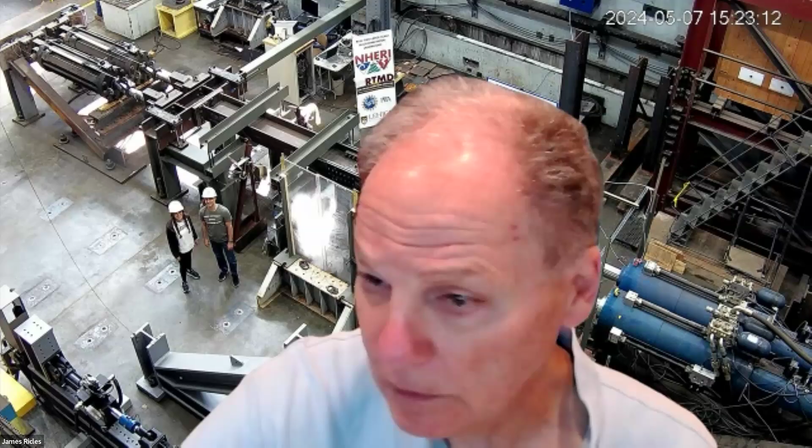Thanks, Jim. Let me just get these up here and I'll share my screen. Please hold. Can you see those slides, Jim? Yes. Okay, perfect. All right, great.

So as Dr. Ricles had mentioned, my name is Dr. Joseph Saunders. I am the NHERI Lehigh Experimental Facility Operations Manager. I'm going to just briefly introduce you to the team here at NHERI Lehigh, go over the agenda, what we plan to present here, and then follow up on what Dr. Ricles had mentioned already on what are our objectives.

So first, the team here, the team is what makes NHERI Lehigh happen. Everyone you see here, and then we have additional staff to really make this organization great and help provide you capabilities and research opportunities. So to start, Dr. James Ricles and Dr. Richard Sause as PIs and co-PIs. They have been our leaders here at NHERI Lehigh for over 20 years. So a vast amount of experience leading the charge.

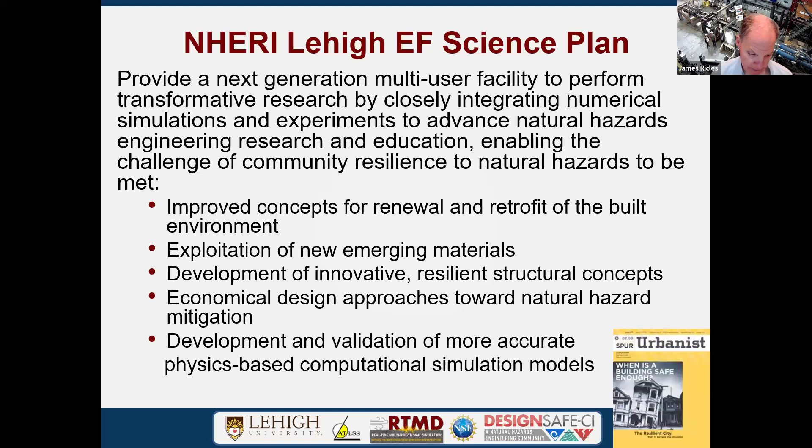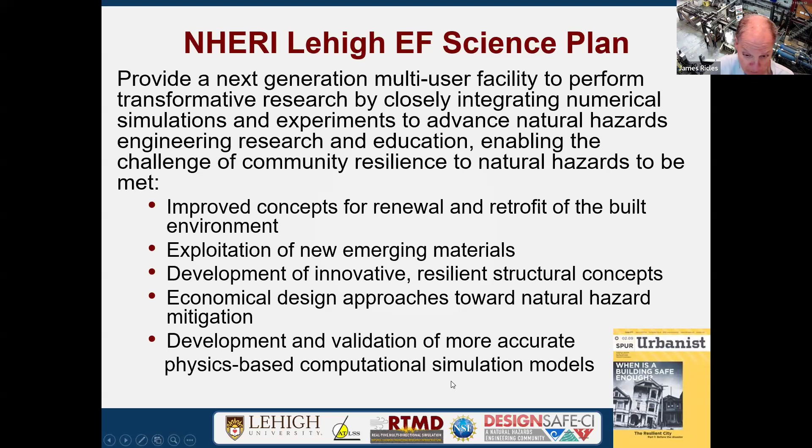This is very important, because what the National Science Foundation likes to see—and you've got to think about this—is that you can't test everything, you can't test everything forever. So our goal here is to do high quality experiments where you can acquire detailed, refined data that you, or someone else, could follow up on to develop accurate physics-based computational models. These are then used for numerical simulations as a follow-up—that would be the next step.

Now, sometimes researchers are a little overwhelmed at first about using our facility, or it's a little daunting to write a proposal. I'd like to comfort you by saying we've been doing this for a while. We try to always adapt toward evolving opportunities and techniques, and in doing so we develop user-friendly tools, so that as a researcher you can readily utilize our facility to do high-end experiments and use the algorithms to perform the research you need.

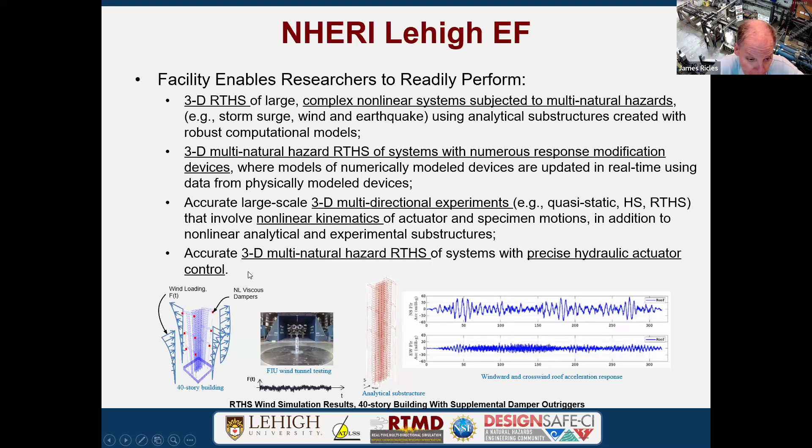So what are some of the impacts here? This is something you want to think about when you write a proposal. You have an idea, but you've got to express to the reviewers and the National Science Foundation or the sponsoring agency what the broader impacts are, because this will separate you from the group of other people submitting proposals.

Here are some impacts about our facility. We can address key questions through research that could lead to various results. One being the development and implementation into practice of new natural hazard mitigation strategies and innovative structural systems. We have a lot of staff, including myself, who are professional registered engineers, so we have a really good sense of what goes on in the real world. Most all the staff has worked in practice, so we brought that to the facility for you.

The other broader impact is enhancing the understanding of the response. This is in the NHERI science plan, one of the things emphasized here. What I add to that is accounting for soil structure interaction as well as fluid structure interaction effects. We've managed to do that.

The other thing is a comprehensive system level effects on the structural and non-structural components through this 3D hybrid simulation. Components don't act individually - they're in the structure, there's a system, and you have to account for those interaction effects. It's very important. I already mentioned the fact of high quality data - this is going to lead again to more improved models for response prediction.

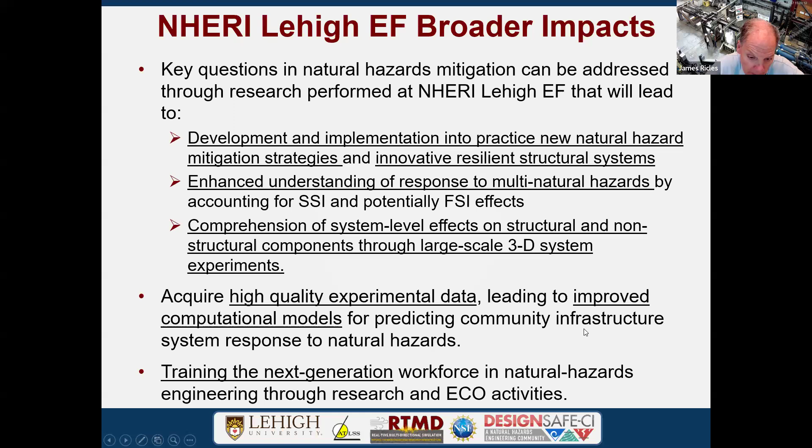Now, here are just some examples. I'm going to be rather brief here, but these are some example projects - some of them are real, others are what I could envision here. We can look at semi-active control devices that are autonomous to enhance the resiliency and performance against multi-hazards. This approach would be real-time hybrid simulation.

We could look at advanced bracing systems and shape memory alloys. We actually have a project already in the lab on that someone followed up on. The approach we would take, and you'll see a discussion later about the technique, is called quasi-static or hybrid simulation.

There's interest in developing complex computational models, and for that you need the data. Here's an example in which the facility could be used to look at advancing multi-directional, through multi-axis loading, of reinforced concrete materials.

There's also non-structural work, like floor isolation systems, since the contents of buildings are sometimes more valuable, both financially and in terms of impact on the building itself. Here's a project ongoing from the University of Oklahoma related to multifunctional floor isolation systems.

We also have additional non-structural components for minimizing hazard losses. This could be cladding or other things that are added that also dissipate energy.

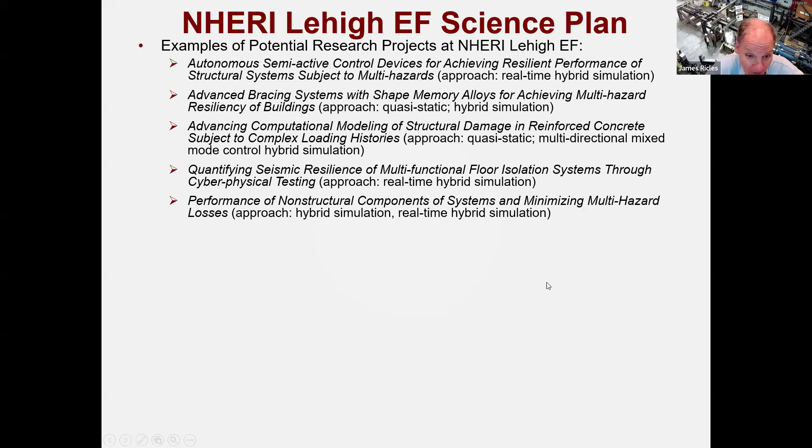Soil structure interaction is becoming very important. It could help you, or it could hurt you. It hurts you if you ignore it, since it adds flexibility, and it helps you if it adds radiation damping. So you need to really account for it, particularly in tall buildings where a soft soil with a heavy load on it could have an effect.

Semi-active controlled cladding, I mentioned cladding. You can have semi-active controlled cladding that we've worked with.

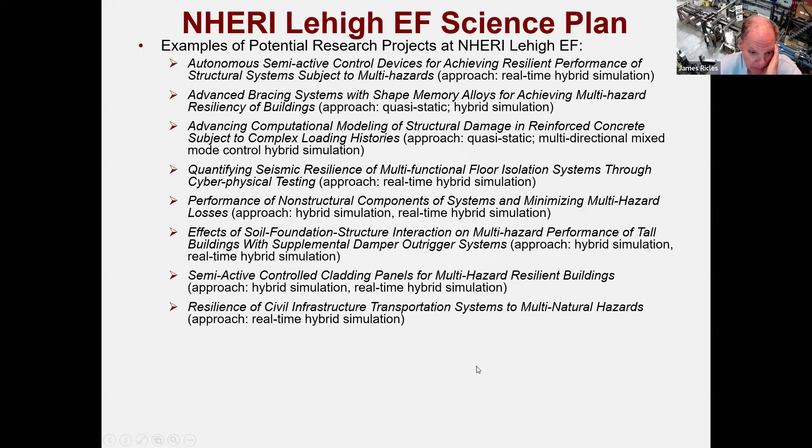Transportation systems - NSF does allow you to now look at transportation systems, and as you know, they're really the arteries of the U.S. economy for transporting things. So this is very important.

Fire hazards are also now fair game with NSF. I'll give you a reference a little later. We do have a furnace that we can use for that purpose.

Coming back again to soil structure interaction, you could have response modification devices, but guess what? Especially with TMDs, it may not be tuned properly because the soil that's actually there in the system - you omit it in the model, and we could account for that in our simulation. So it's very important to consider the system as a whole, including all these other effects.

Very, very important, and people have come to realize this more recently with all the storms and climate change, is the coastal infrastructure and the inundation from storms or tsunamis. We have a new faculty member, Claudia Reich, who's an expert in this area and could lend some guidance on that. She's doing research herself in this topic.

So with that, let me describe the facility. We were originally a NEES facility, Network for Earthquake Engineering Simulation, but we really like to think of ourselves as being a real-time multi-directional facility. You can replace earthquake with multi-hazard if you wish, but earthquake is where we initially were born.

My own background is originally earthquake engineering, but obviously I had to migrate towards other areas in order to adapt to the pressing needs in research. So we're very unique in that we have a portfolio of equipment, instrumentation, and infrastructure itself.

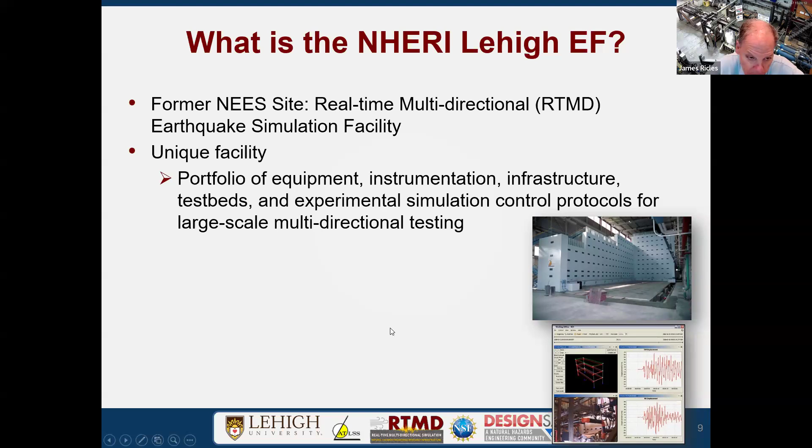Now, on the right, you can see many experiments going on - I think I counted 8 here. We currently have 13 in our lab, but we manage. Joe Saunders has a big stick and makes sure things get pushed in the right direction in the lab, but we're very efficient in that we can conduct concurrent multiple large scale experiments. So the wait time is not like a shake table where you have to wait till someone gets off. We allocate space basically based on the need and the demand.

Very experienced staff - I mean, they could do anything. Some of them have been around for 40 years, longer than I have here at Lehigh.

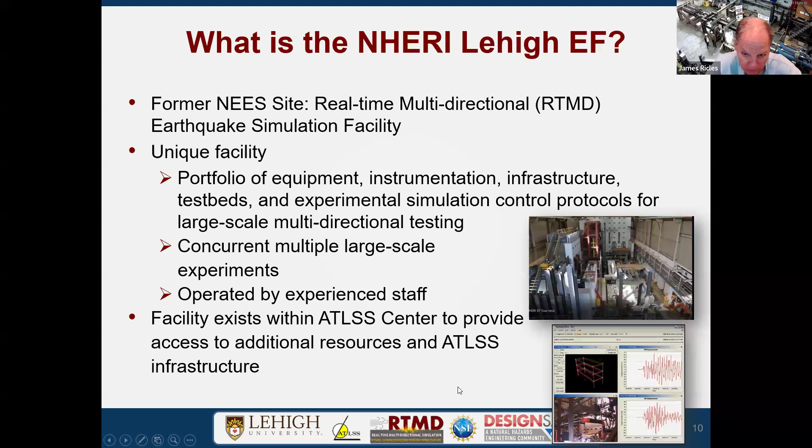So just a little bit about our expertise. As I said, we're pretty diverse in our faculty and also our research engineers and staff. My own background is structural engineering, but I do earthquake engineering as well. I've done some wind, but we have other experts in that. Geotechnical engineering is Professor Muhannad Suleiman. He's our faculty, and he's actually the co-director of the ATLSS facility.

Now, I like to think of ourselves as being pioneers. We didn't invent real-time hybrid simulation, but I like to think we've taken it to the next level. Myself being a structural engineer by trade and having worked in industry before I came back and finished my academic training, I knew how to design structures. I understood how engineers face challenges.

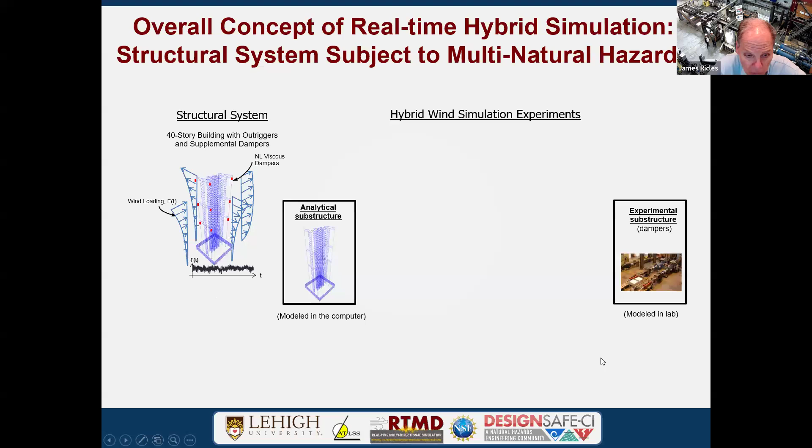We're going to take this system and divide it into two domains, two substructures. What we can model with a high degree of confidence, we're going to put in the analytical substructure. This is, say, a finite element model, or it could be a neural network. And what we can't model with confidence, we're going to put physically into the experimental substructure.

In this case, just the dampers, but it may be more. So that's in the laboratory. These two things are part of a system. They have to talk to each other. They have to interact. So we have a coordinator that ensures that.

So for a given point in time, you have these equations of motion: inertia, the damping, that's the second term of the velocity on the left side. We have capital R sub A and R sub E. Those are restoring forces. R sub A is the response of the analytical substructure to command displacements, and the experimental R sub E is the response from command displacements to it.

And the right-hand side is the applied load. Let's take a point in time, i plus one, when we have the applied load. We integrate the equations of motion, we send command displacements to the two substructures, and we get back the restoring forces. Now, this has to be done well within the time step, because if it's not, you have delay. And if you have delay, it's chaos. You're going to put energy in the system, and believe me, we've experienced this before. It's going to blow up on you. So this all has to be synchronized and done well within the time step.

So we use special integration schemes in order to achieve that. And if you're able to do that in real time, you have the response. Now, everything doesn't have to be in real time, so we can slow it down. Tommy Marullo, our IT expert, can run things at any pace you want, I guess even faster than real time if you had to, but that wouldn't really be necessary.

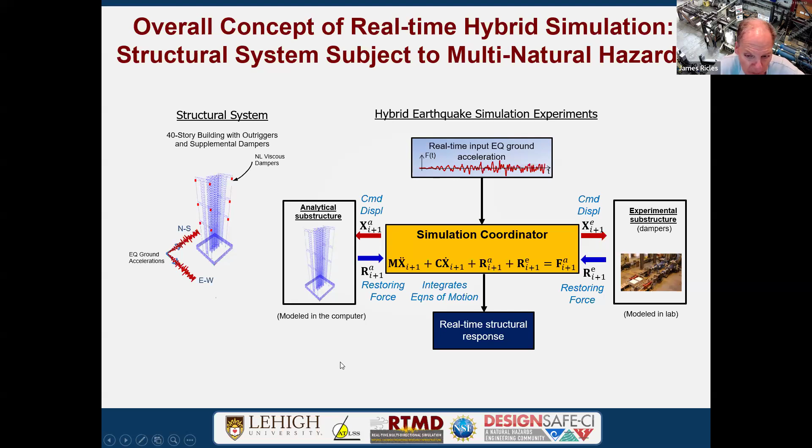Now, if you want to go to a different event, the novelty here is that for an earthquake, you can change the forcing function as shown here. Everything else essentially remains the same. Of course, the response will be different. If we had fluid structure interaction, the same thing. We have been able to account for true fluid structure interaction, where based on the relative motion of the fluid and the structure, we can calculate the response. I'm not going to present that today. I think Liang Cao will present some of that later.

So why is this important? Well, it's real-time simulation of the response in the hybrid sense. Hybrid is cyber plus physical. Cyber is well understood. You can model it numerically. You can have various experimental substructures you link with the cyber. The physical part you don't understand well, so you need to model it physically, but you better have the right interface boundary conditions, which is something we understand really well. So we set up the right experimental substructures for you, and we'll talk to you about what we could propose to make your experiment work.

And we can accommodate large scale. Large scale is very, very important. Not everything scales. When you get fluid structure interaction, multi-physics, you cannot use reduced scale models. It doesn't work. And so it's very cost effective. We get the best of both worlds, numerical and physical. You can incorporate a component into the system. This is why it's used as a tool. And you can look at rate dependency. So if you need to look at the system and at rate dependency, real-time hybrid simulation perhaps is the thing you want to consider.

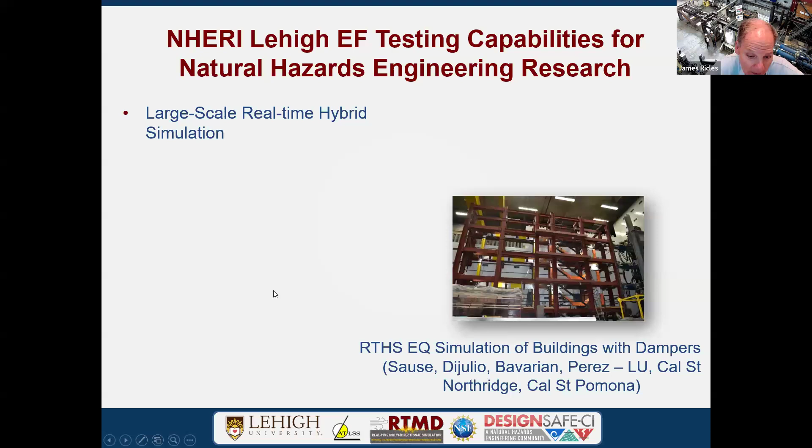Now, just a few capabilities. We can do large-scale real-time hybrid simulation. You see this on the right. There's a yellow frame inside one of our bracing frames. The researchers are noted below here. We can also do large-scale hybrid simulation where we slow it down. Again, not everything's rate dependent.

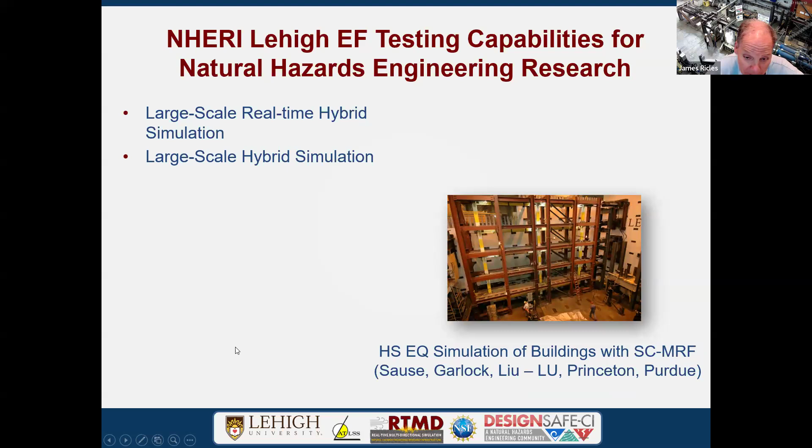You saw previously a lot of the physical structures, the yellow and white. Rather than test that, we may have a really good model for it. So we may just have the dampers shown here, or five dampers across the bay, with actuators attached to each. Those dampers would be located throughout the structure. This is multiple experimental substructures.

Now, we have participated with various facilities in geographically distributed hybrid simulation, and we could work with some of our audience if they have the need, where you'd have the experimental component in your lab, and we'd work via the internet, connecting the numerical part with the experimental through the coordinator. We've also done that in real time. I want to mention transportation momentarily.

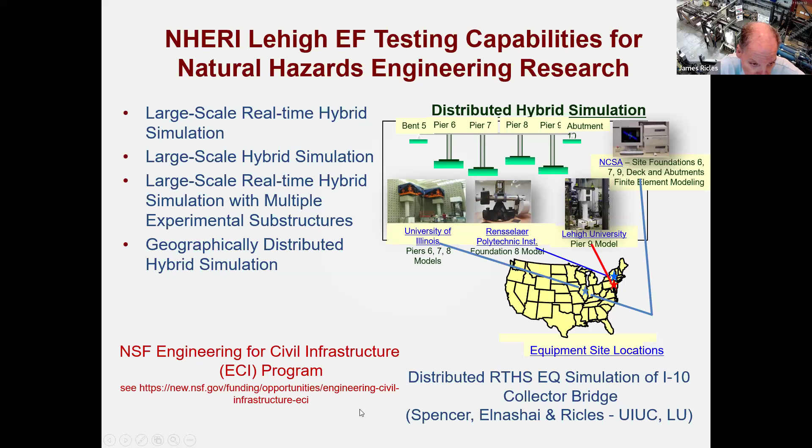This was a transportation structure looked at with UIUC and Lehigh. And there is this opportunity now, you can make a note about this. It's basically the ECI program where you can look at transportation systems here. It used to be off the menu, now it's back on.

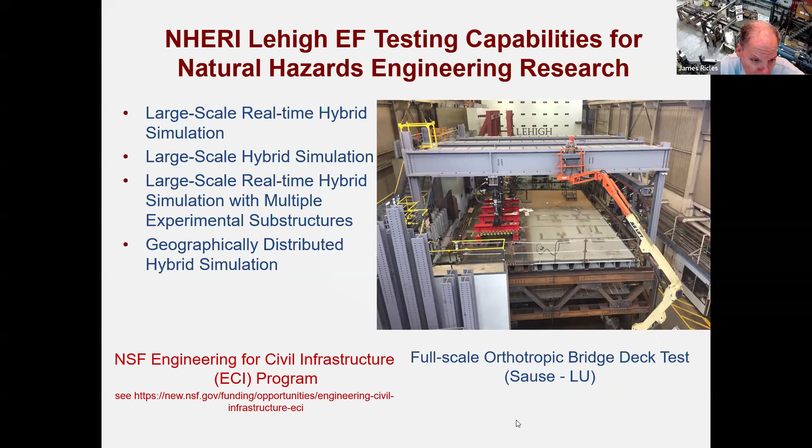This is some other bridge work. This is Dr. Sause's level of expertise, so he can give you a lot of information on that. Orthotropic bridge deck, full scale. We've then done geographically distributed real time. There is a latency in the internet that we have to deal with, that we've managed. This was done with Dr. Kim and Professor Richard Christenson at UConn.

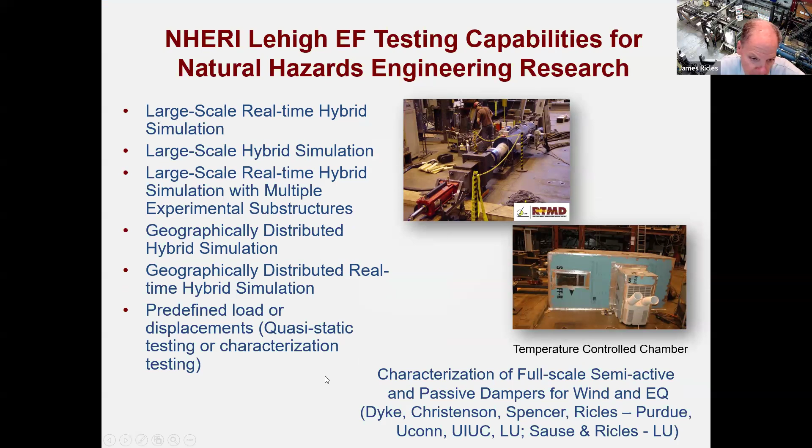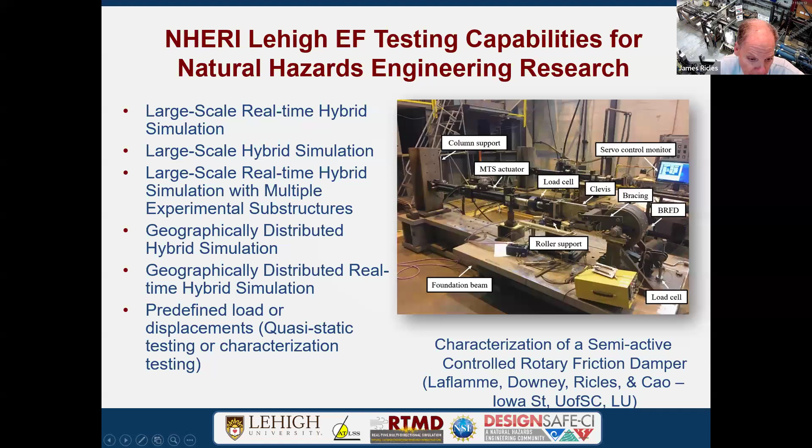And I want to say we don't just do real time, we do a lot of characterization tests. This is predefined loads or displacements. Here we're just showing some examples on dampers, just trying to characterize the damper, maybe get the parameters to a model that you're comfortable with. And also we have new types of damper. These are rotary friction devices that have really very, very high efficiency. Not only on dampers, but also systems.

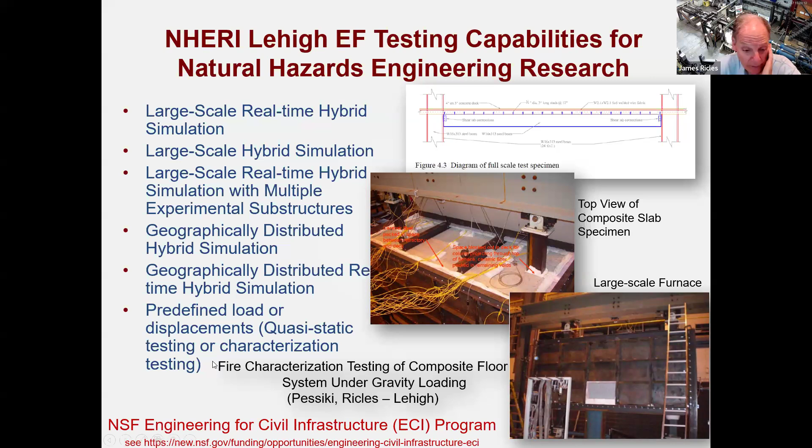Fire as well, we have a furnace. And again, you can go to the ECI program at NSF. You see that that's actually allowed. I've used this a little bit, but the person that really is the expert is Professor Stephen Pessiki. He's one of our faculty members here. Here's the link to that.

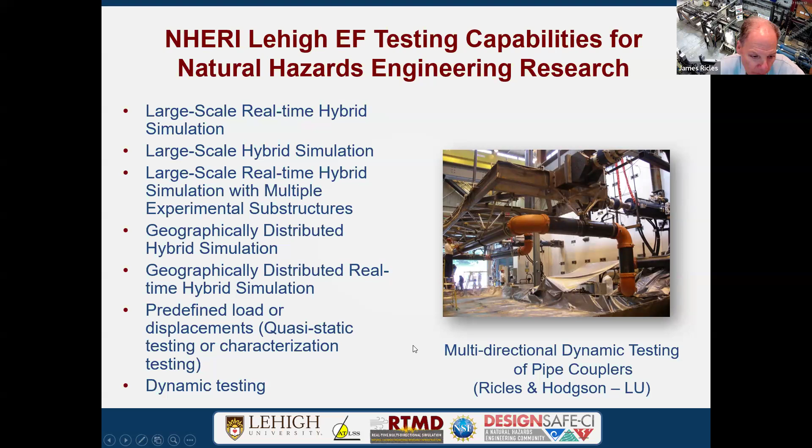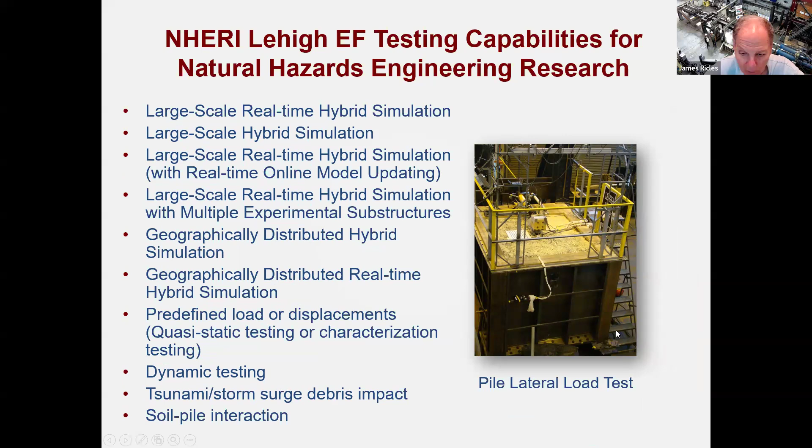And soil, we have various soil boxes. This is one of them, there's three of them. We have large, medium, and small. This is the medium size, 6 by 6 feet. We've done offshore wind turbine tests in real-time hybrid simulation, accounting for soil structure, aeroelastic, and hydrodynamic loading, and developed the models ourselves, so it's not a black box.

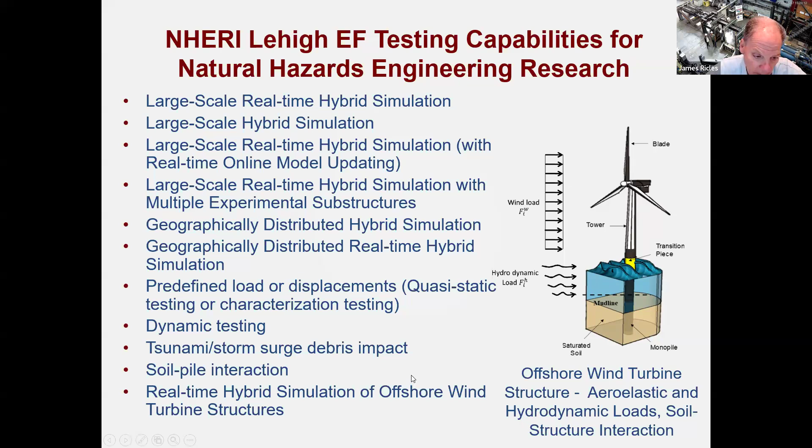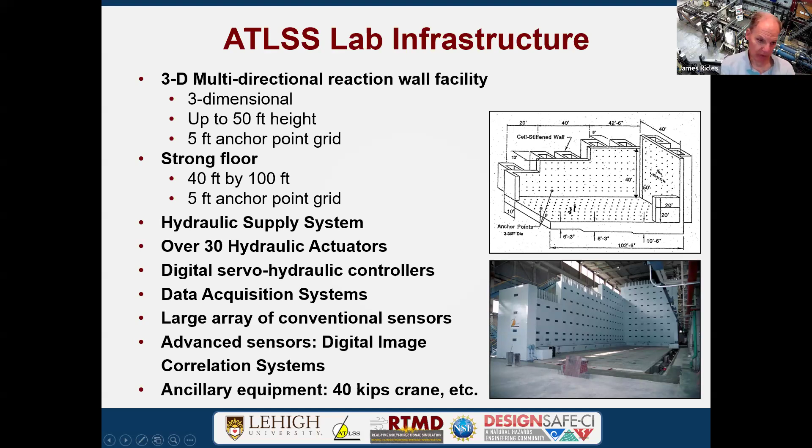This gives some dimensions I mentioned already, and unfortunately, if you're used to metric, it's imperial units I listed, I think you can convert that in your own time. So this is part of the ATLSS infrastructure. We actually outfitted that with some dynamic capabilities, we took advantage of the hydraulic supply system, added some other things I'll talk about later, but there's over 30 additional actuators that we have besides the ones we have for our NHERI, which I'll get to in a little bit.

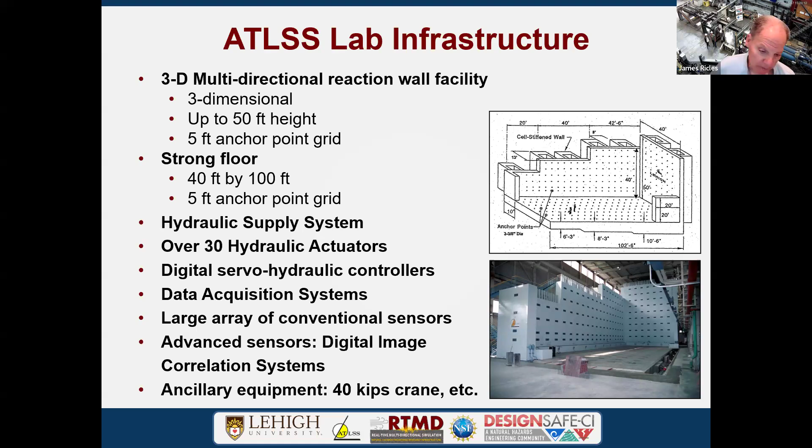Digital controllers, many acquisition systems, an array of conventional sensors, but also advanced sensors, and we have auxiliary equipment to move things around, for example a 40 kip crane to position things in place. Now, that's the ATLSS. That was the shell. We outfitted some pieces in the shell, that was basically NHERI. Started this in 2002, over the years, 22 years later, but it didn't take long to put it in.

We did that all within 2 years, but we added hydraulic power. This is an accumulation system. We have already existing pumps. We have 6 pumps, perhaps 5 to 6 pumps, but actually 5 pumps, 120 GPM each. That's 600 GPM total. A distribution line takes the hydraulic power around the lab.

The accumulation system allows us to go more than 4,000 gallons per minute. We can go over about 1.2 meters a second, and these actuators are shown below. These are large dynamic actuators. Now, what we've done is to look at demands, and so certainly we could accommodate very demanding earthquakes for 30 seconds. Earthquakes may be longer, but the demand won't be as high, and we can easily accommodate that, as well as other natural hazards, such as windstorms and inundation due to storms.

To give you an idea, I already mentioned the hydraulic supply system and the accumulation system. Dynamic actuators are shown here in imperial units, but 517 kips is close to 2,300 kilonewtons. The other one is a little bit smaller, 382 kips, but we have 5 of these. The stroke is plus or minus half a meter, so we can actually go 1 meter, 500 millimeters. And here are the maximum velocities. We can actually go a little bit faster if you need, because we can add more servo valves to the actuator. We have 10 of these we can reconfigure per actuator.

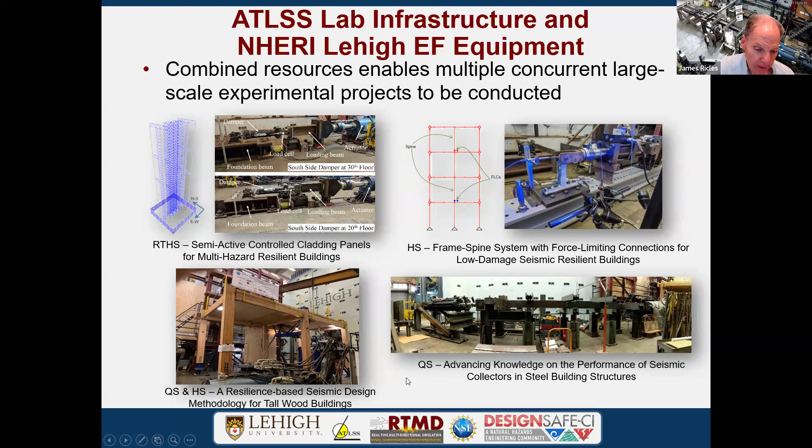That's the only time you can't go in the lab, when we do this test. It's for safety reasons, but we can do all these without much delay between the experiments. Do we do them all concurrently? No, because we don't want to run the risk of having crosstalk, but we can go in the lab, do one in the morning, and when we're done with that, we change the controller over to using the equipment at another location in the lab.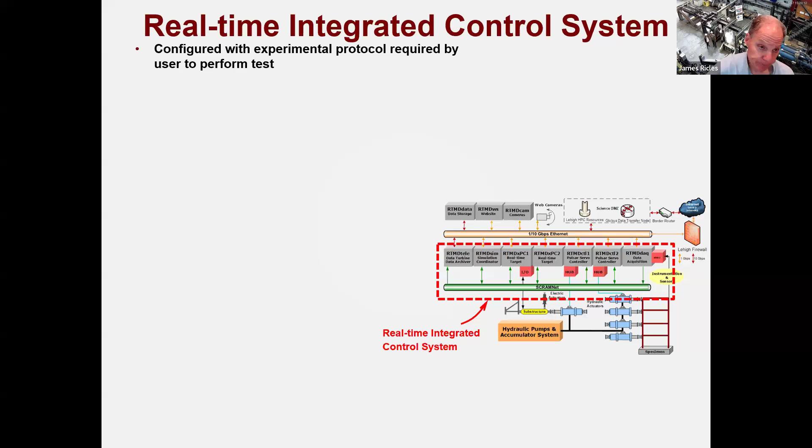So we have an integrated control system that Tommy Marullo, our IT expert, set up. It's got various workstations that are configured and linked with ScramNet, which is basically shared memory. This allows us to configure the system to do the tests that I showed you, but even more. If someone comes up with a novel idea, we can entertain that. The algorithms we have, we can run in real time, or if you need, we could expand the timescale to slow it down, whatever the user needs.

Now, for distributed hybrid simulation, we have our own software, but we're also able to interface with OpenFresco. It allows us to interface with OpenSees. If you ask, do we use OpenSees for real-time hybrid simulation? The answer is no. Real-time hybrid simulation, in our case, requires customized software because of the synchronization. OpenSees is a good program, but it just doesn't suit our needs.

Again, we're flexible in that we can inject software and middleware packages developed by the users, but I warn you, it'll go through an interrogation because we want to maintain the integrity and the safety of that. So we'll go through a number of tests, but we've worked with many users in that regard and come up with novel software for testing.

A few other resources: we have our own specimen preparation. This is in the front of the lab. You see a frame here that was built. We have resources to do mechanical testing. We have an auditorium for ECO activities that provides an audience a nice place to hear our in-person researcher workshops. In addition to prep areas, we have other laboratories: intelligent structures, mechanical testing, welding and joining of materials, and microscopy. And of course, offices. We have a lot of visitors and we accommodate them with offices.

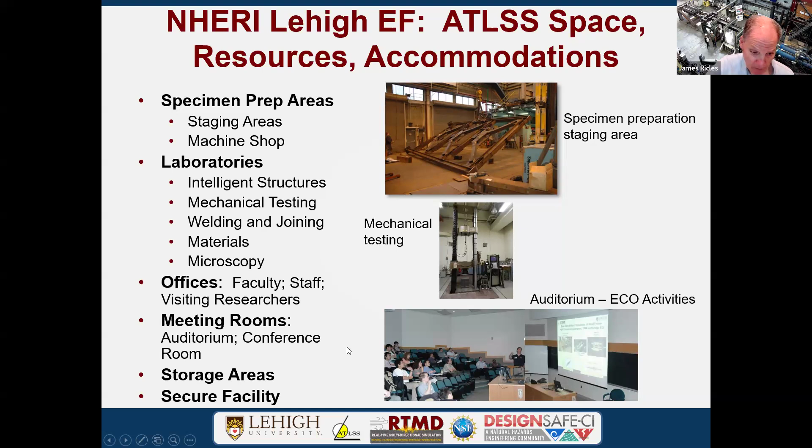So students certainly should come, researchers. We've had students stay as long as a year. Not that it takes that long, but we accommodate you. And meeting rooms, of course, a lot of Zooms like today. Storage areas that we can store specimens, although we don't like to store a lot of extra things that aren't needed. But we have storage, and it's a secure environment and a safe environment, both in diversity, inclusiveness, but also from a monetary perspective with the equipment.

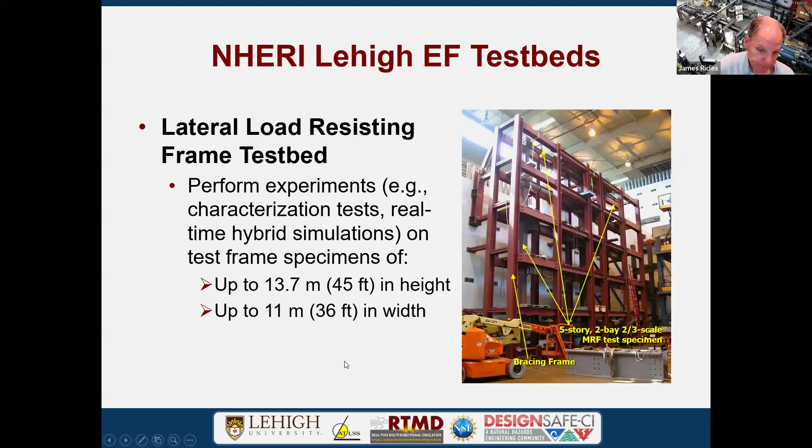We have various test beds. One is a large lateral load resisting frame test bed that you see the dimensions here. They're really planar frames, but you can simulate those in multi-direction if needed. We also have a non-structural simulator. This is one in which we have piping that I showed earlier running throughout the floor of a building system. This is a multi-directional test. Multiple test beds for actuators. Each actuator is in a separate test bed, and each test bed has, say, a damper or device. You can use those for just characterization and real-time hybrid simulation. Some of the capacities of those test beds are really based on the actuator, so the fixturing is stronger than the actuator, so you can go up to these capabilities.

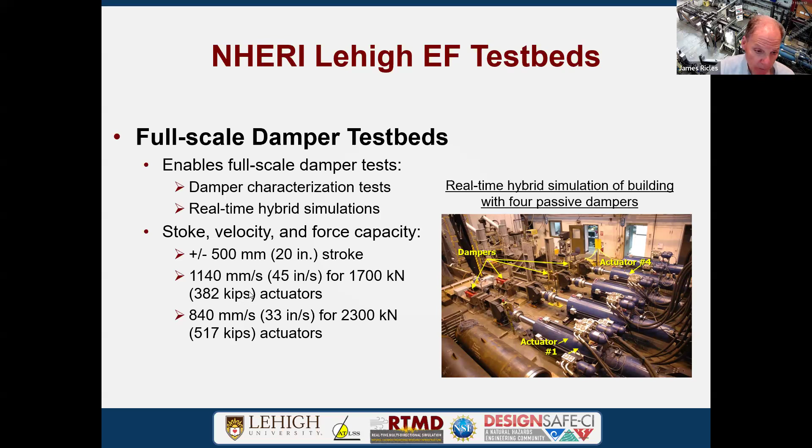The real-time hybrid simulation also is extended towards our cyber physical structural systems lab. We got an extra 4,000 square feet in which we've created this laboratory. We've actually expanded the footprint. It's used to enhance research and researcher training, so you could participate. It gives you a lot of hands-on experience. We also have researcher training workshops and planning workshops that you can go on our website and you can actually arrange for one to come and get trained and actually generate some pilot test data for a proposal using some of the test beds. So it's a little bit smaller scale, but not too small. Depending on what you're testing, it's actually full scale. But as I said, it's really low cost and hands-on and very easy to arrange and very efficient for that reason. These numbers don't mean anything, but I'll show you the capacities related to these model numbers here.

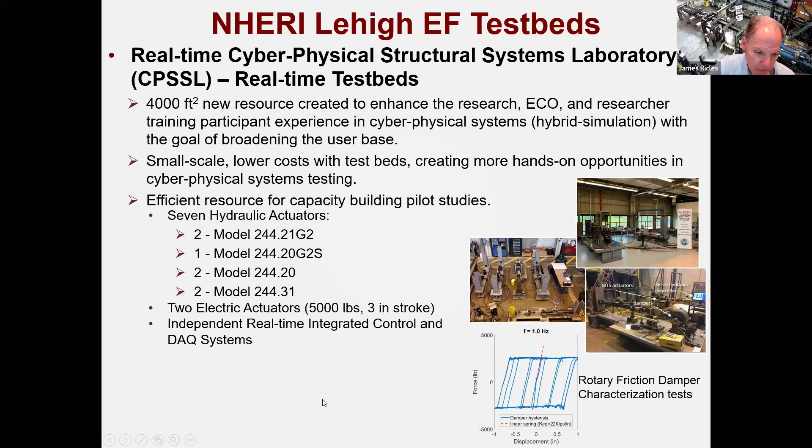We have both hydraulic and electric actuators, integrated control system. Then this system is identical to the twin, the big sister that originally we had in the main control room. They're identical in architecture and hardware. So if you arrange and do something here, you could transport it to the other control system as well. And the two systems can talk to each other. Here are some of the actuator capacities. Again, we can go pretty fast there, over a meter a second, with some of these actuators, depending on what you need there.

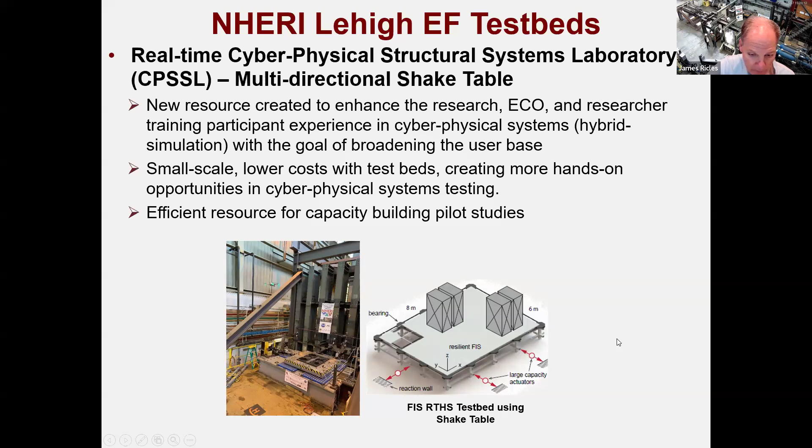It has a pretty good payload. It's something Dr. Cao designed. We didn't buy it. We actually built it, and payload's about 13 kips, about 6 tons at 1G, 6 by 6. That's about 2 meters by 2 meters almost. And the stroke is 7 and 10 inches in 2 directions with peak velocities of 51 and 29 inches a second.

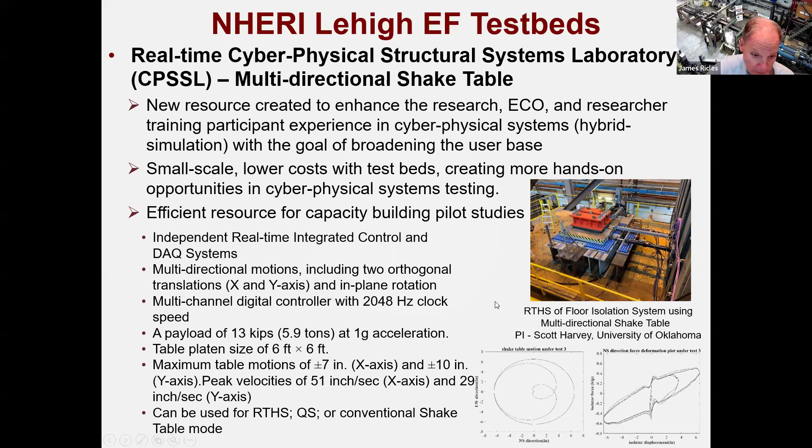So it can meet quite a bit of demand. Here's the directions we can accommodate. You ask, can we go vertical? My answer is not yet, but that's in the plan to go vertical. So it's going to be 6 degrees of freedom.

You've already heard about this, the tsunami debris. We have high resolution, high bandwidth load cells. Other equipment includes the soil box.

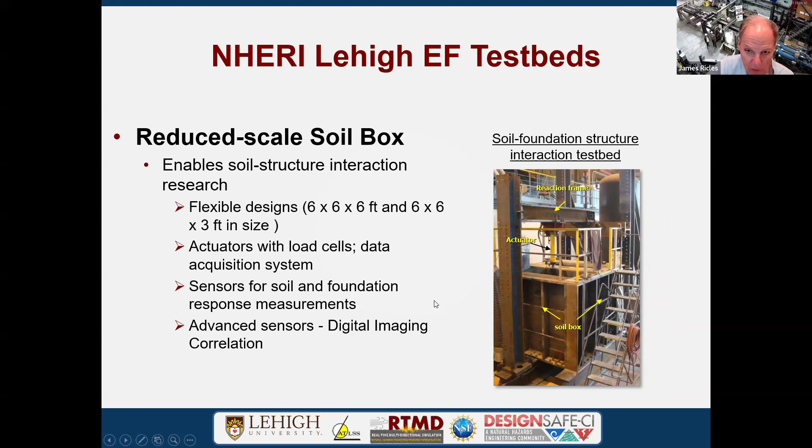This is the one I showed you earlier, 6 by 6 by 6 in width, dimensions, and height. You can actually stack 2 of them. It has advanced instrumentation, so you can really get some high quality data. Professor Suleiman, whose name will come up shortly, is the overseer of that.

Here's Professor Suleiman's name. We also now have this big sister soil box. You see it here for scale. This allows us to do very large scale soil testing, and it has advanced sensors again with electric actuators, multi-direction. We can handle 6 degrees of freedom at the top of, say, this pile that's there.

We also have a control room right here that allows us to do hybrid simulation with anything in that soil box. Back here is a shake table. Here's the furnace, by the way.

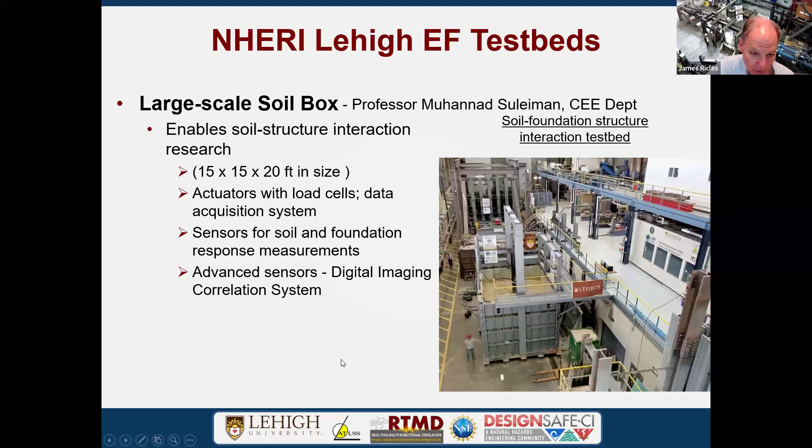I don't know if you can see my cursor. Up here is the mezzanine with some of the other test beds I referred to earlier. This offshore wind testing facility is really part of - or should I say the soil box is a part of that.

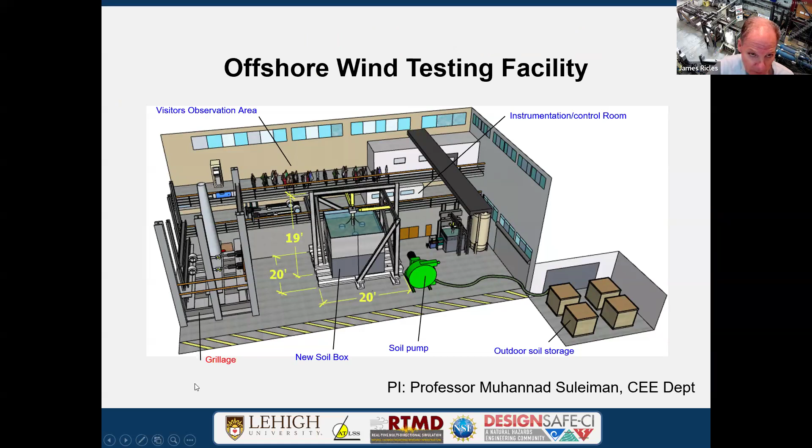Again, Professor Muhannad Suleiman is the overseer of that. I'm not doing it justice by naming it by its official name, so forgive me, Professor Suleiman, but it does have an official name - it's really the Offshore Wind Turbine Testing Facility at Lehigh.

Now, fire - here's our furnace. It's reconfigurable, so it could be built around structural components that could then be tested, say, as part of a hybrid simulation.

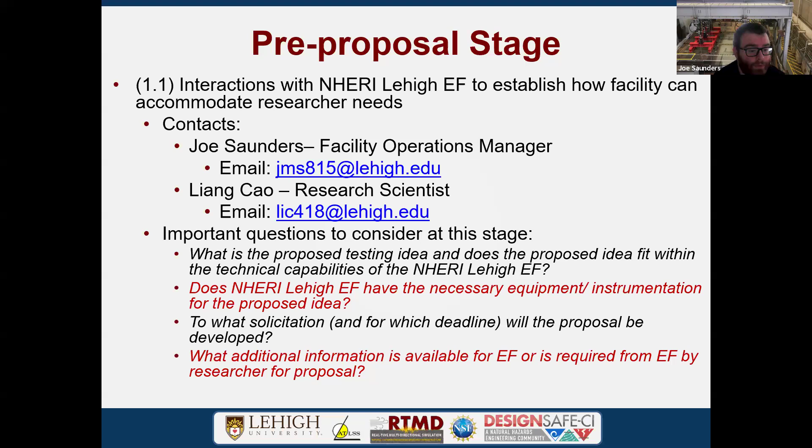The third is important: what solicitation are you putting together your proposal for, and what's the deadline? We've had, unfortunately, people come a few days in advance of submitting proposals, and it's very difficult for us to give you good quality information on scheduling, budgets, technical ideas, and help with a proposal on such short notice. We generally like to have as much notice as possible if you're planning on working with us. Thank you to those who have given us many weeks and months in advance, it's much easier for us to help you hit a good proposal. And then, any additional information you think we'll need to help facilitate your proposal.

As mentioned, we have a lot of resources on our website, so again hyperlinks all over here with additional documentation. These are some tips on writing your proposal, and specific areas like utilizing the facility, which include resources, your research plan, schedule, budget, and a data management plan, which I'll go into in more detail later. Some other useful resources on our website are our usage rates for both NHERI and non-NHERI projects.

Those are projects that you have funded through NSF and you're coming to use the facility. Usage rates for non-NHERI projects would be other federal agencies, other state agencies, etc. The responsibility of costs: if you're coming in with an NSF project, what is your responsibility through your NSF grant versus what is our responsibility in terms of the operations and maintenance budget we are afforded. That data management plan, our lab safety plan, and a user's guide, which really summarizes a lot of the information we're presenting today.

So then, what do you need during the proposal writing stage? As mentioned, reaching out to us the sooner you can, the better. We really recommend you read through the PAPPG, the NSF's Proposal and Award Policies and Procedures Guide, which gives information on how to prepare your proposal. You'll want to communicate with us, and again, this is really critical for us as a facility to help you: what resources do you need, what sort of timeline do you have in mind. We will certainly help you with a budget, but if you have a budget in mind, giving that to us, and then your data management plan.

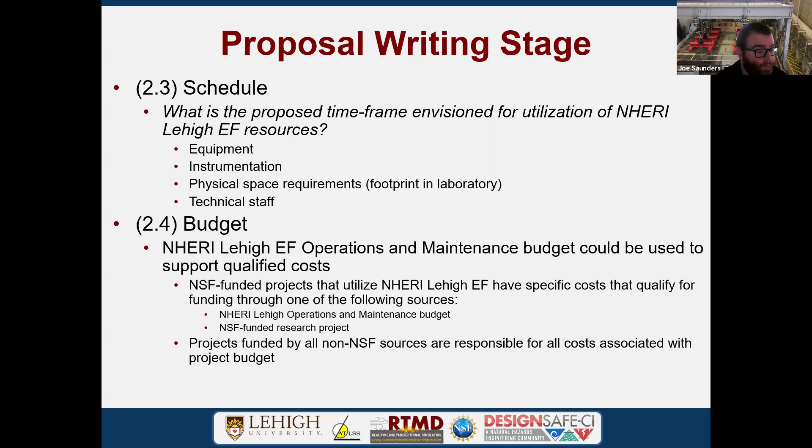Our schedule and budget - these are two things that are quite important to me as the operations manager, making sure that we're keeping all of our projects moving. What we need from you is an idea of when you need certain resources, including equipment, instrumentation, and personnel. And then the budget, of course, that's important to all of us. Our goal is to keep things within the budget that you give us, and we want you to have a realistic sense of what you need to budget in order for us to execute your ideas and your research.

I had mentioned this before, but the breakdown between NSF funded and non-NSF funded projects - there's more details on our website. Additionally, the responsibility of costs has a breakdown of whether you are responsible for your NSF project budgeting, or if our NHERI operations and maintenance budget will cover costs. You can always reach out to me if you have additional questions or need information.

The data management plan - that's really important to NSF. Something you have to be mindful of when working with our facility or any NHERI facility is that at some point at the end of your research, you will need to publish the data that we generate together. This will need to be uploaded to DesignSafe, which is NHERI's repository for data, and that will be published with a DOI. So having a data management plan is critical on how you plan to execute that, and what type of data you plan to upload and generate.

So all important for an NSF proposal specifically, and using our site with NSF grants.

Jumping into what it looks like once you have a project here: there's user training, developing the experimental protocols if needed, specimen construction and instrumentation. Then we'd go through testing, upload raw data and then curate that data onto DesignSafe as we're closing out. And then we'd need to demolish any of the fixtures or specimens that you have that we've constructed.

Some user training documents that we like to use - really what these are for is to make sure that when proposing to our site, you'll be able to actually utilize the resources that we have. So there's an equipment, facilities, and policy compliance check that just goes through what's the experimental feasibility that you're proposing and using our site.

Making sure that safety is paramount - that's a very high priority item for us here as an experimental facility. What your budget, schedule, and data look like - if you had come to us already before, during the pre-proposal or during the proposal stage, that makes the post-award stage smooth and seamless, because we will have worked together already on a budget, considering safety, and had looked through experimental feasibility and a schedule. So again, the earlier you talk to us, the easier it is from pre-proposal all the way through post-award stage.

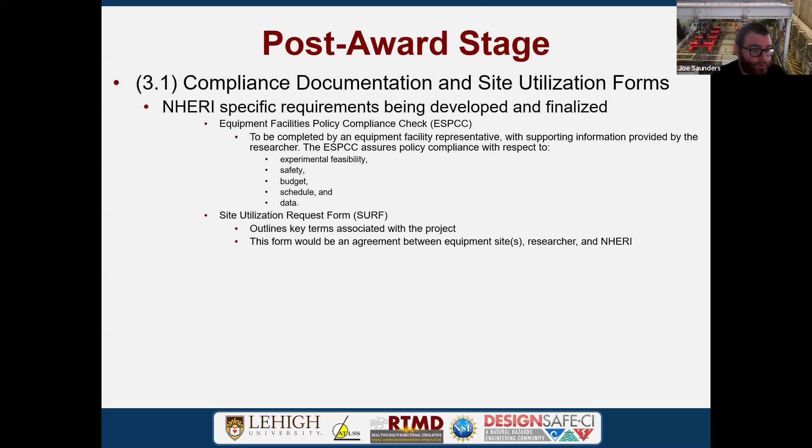Kind of went through all this already. So I want to jump to researcher training and then some of the other steps during the post award stage. So researcher training, again, is incredibly important to us. Depending on whether or not you'll be utilizing the equipment, you'll need to be trained on how to utilize equipment if you need to. Safety is always, again, paramount to us.

So if you are planning on coming to either visit the lab or partake and witness your experiments, you'll need to be safety trained. And then controls and data acquisition, right? Again, if you plan to be hands-on and want to control your experiments, you or your students or postdocs will need to be trained on how to utilize our equipment. And then also in terms of data acquisition, installing data acquisition, sensors, strain gauges, whatever you have or whatever we have and you want to utilize, training is important.

The experimental test plan and scheduling and testing, right? So that'll be an ongoing dialogue between you and us about what sort of days, time, months, weeks do you need blocked out in order to perform your tests, and what does that look like, right? What equipment do you need? What personnel do you need? When do you need it by?

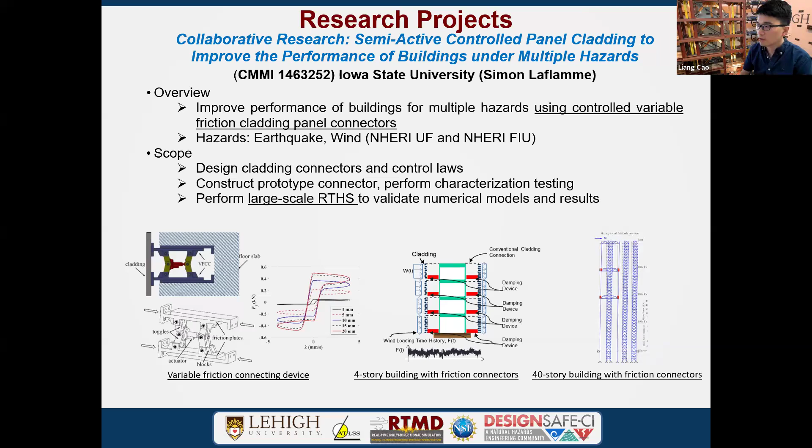So the idea is at Iowa State they 3D printed a designed semi-active friction connection device to connect the floor slabs with the claddings, and the scope is designing the cladding connectors and using a semi-active control law to mitigate multiple hazards, and performing large-scale real-time hybrid simulations to validate the dynamic models from Iowa State University.

And at Lehigh, our scope is to design our prototype buildings and then perform nonlinear time history analysis to assess the connectors' performance. Also, our shared goal is to perform large-scale real-time hybrid simulations to study the semi-active control panels' performance.

So what we did first, we did real-time hybrid simulations utilizing our 40-story tall building subject to multiple natural hazards. From this graph, you can see the details of the analytical substructures. So this is a 40-story building, including 2 outrigger columns on the north and south bays, and on the outrigger columns, we're installing 12 nonlinear viscous dampers to mitigate the natural hazards.

And so the experimental substructure will be a nonlinear fluid viscous damper installed on the outrigger columns. And the entire 40-story building was modeled as the analytical substructure, including nearly 7,900 degrees of freedom and nearly 3,000 elements, including 2,411 nonlinear force-based fiber elements and 11 nonlinear explicit Maxwell elements, with real-time model updating.

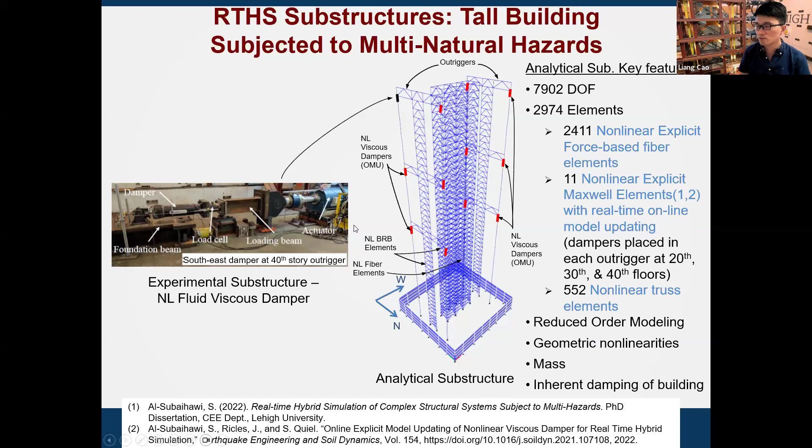So the entire building will be a nonlinear structure, and we just utilize a large-scale viscous damper in the lab as the experimental substructure. Before doing the experimental substructure, we also did a characterization test to build a numerical damper model. This characterization test is a typical test protocol, which can be used for any type of damper study.

So we're doing a harmonic displacement control test, including 2 ramp-up cycles, 3 ramp-down cycles, and full cycles. And we did different frequencies, and you can tell the damper force is highly related to velocity. It is rate dependent. So that also highlights the reason we have to do the real-time hybrid simulation. We cannot slow the test because the damper force is related to the speed.

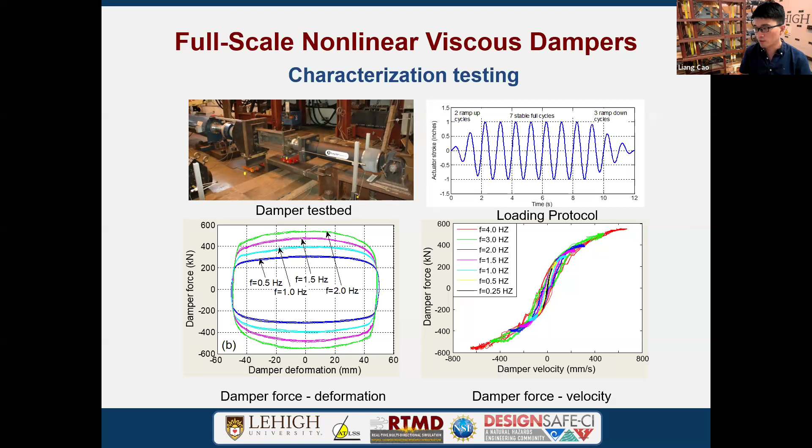So this is the video of the 3D real-time hybrid simulation and the earthquake. The earthquakes were scaled to MCE levels, and you can see the top graph is the top view of the roof displacement in the north and south directions. The middle 2 graphs are the 1st-story north-south and east-west BRB frames, and the bottom graph is the damper performance.

You can see the BRB frame has highly nonlinear behavior under the earthquakes, and also the nonlinear viscous dampers installed on the 40th story dissipate a lot of energy based on this dynamic force-displacement plot here.

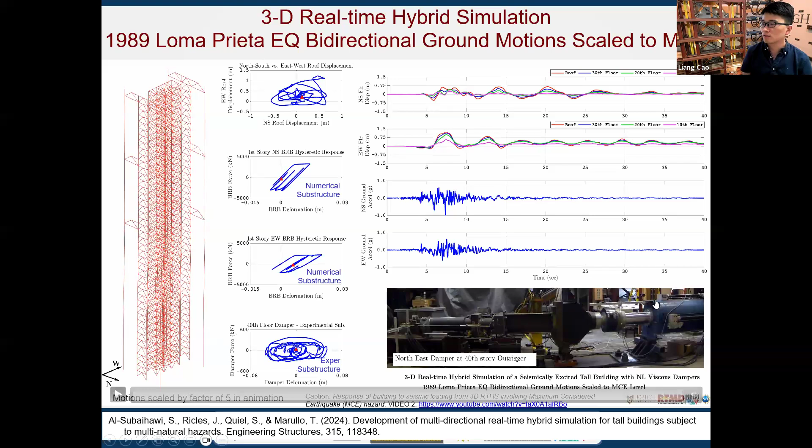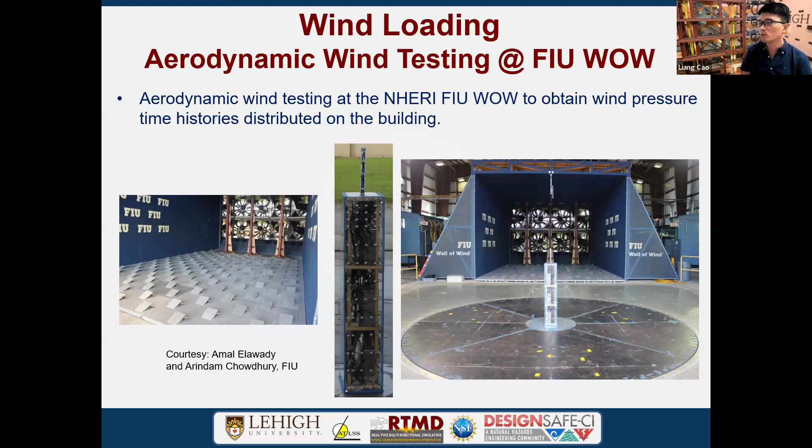Instead, we also studied the wind load. This wind load is captured from the FIU facilities, also one of the NHERI experimental facilities. In there, we built an aerodynamic model in their lab, and you see this is a 1/150 scale to mimic this 40-story building, and we included 338 pressure taps all around the surface of this building. So we are able to capture the 3D wind load, and we are using this 3D wind load

as external excitations. Because those nonlinear viscous dampers are only installed on outrigger columns, they only have a major effect in the north-south direction, but in the east-west direction those outrigger columns do not provide much effect to mitigate the wind. So instead, we also added tuned mass friction dampers on the top, as another experimental substructure.

So this is the video. The tuned mass dampers we're using are what we developed before, what we call the rotary friction damper. It is also one type of semi-active friction damper. But for these wind studies, we are only using this friction damper in its passive mode, where the friction force becomes constant.

So this is the same graph. We are also adding the experimental friction dampers, the tuned mass friction dampers, on the third graph, and you can see under the wind load, this is pretty much first-frequency dominant. That is the difference. Also, the wind is blowing at 45 degrees, and we have a lot of vortex shedding effects generating this shaking. This is also why we have to do 3D hybrid simulations, because if we only model the wind in one direction, we're not able to capture the vortex effect.

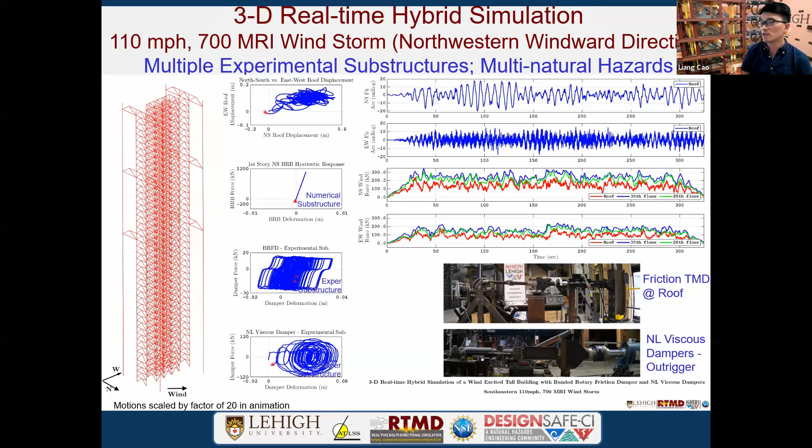And here are the results. This is just a brief overview. After we installed nonlinear viscous dampers in outrigger columns, under earthquake we are able to reduce the maximum story drift by 22% and the maximum accelerations by 25%. Under wind, we are able to achieve up to 35% acceleration reductions, which is pretty impressive.

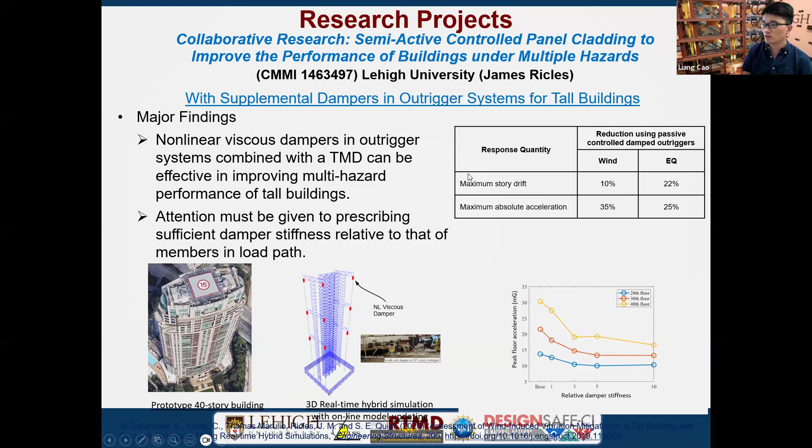Also, this is a project between FIU, Florida International University, and Lehigh University. What we saw before is the same 40-story building, and the wind load was prerecorded using an aerodynamic model. Aerodynamic means we build the model prototype, and it's fixed in the wind tunnel. Here, we try to study the aeroelastic effect, where we developed a new type of technique called 3D real-time aeroelastic hybrid simulation.

Instead of only having experimental substructures and analytical substructures, we also add something called aeroelastic substructures, built in the FIU wind tunnel to capture real-time wind force. Those aeroelastic substructures have rotational centers underneath, and we utilize two electric actuators so the substructures can move in real time based on the simulation coordinator. So basically, this aeroelastic substructure can capture the real-time wind force under certain deformations of the structure.

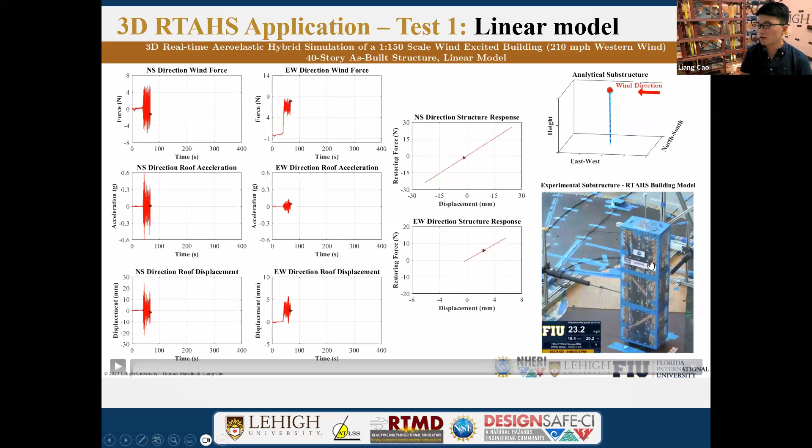In this study, first we model the building as a linear model, modeled as a 2-degree-of-freedom system, and we sped up the video because the real test takes a really long time, about 10 minutes. So we don't want you to watch the 10-minute video.

And the most important part is you can see the wind is blowing in its short east-west direction, but most vibration is coming from the north-south direction, and this vibration is actually caused by vortex shedding. This is also important: under wind load, we have to model the structure in 3D. Otherwise, we are not able to capture this vortex shedding effect.

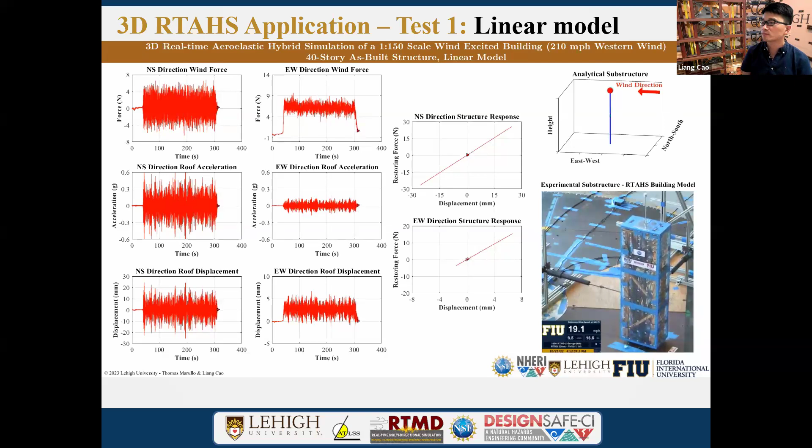So in addition to that, we also studied soil-structure-foundation interaction using neural networks. The challenge in studying soil-foundation-structure interaction is how you're going to model the soil. In the traditional way, if you model soil in OpenSees, it could include thousands and thousands of degrees of freedom, which would be impossible to do in real time. So in this case, we studied utilizing neural networks to model the soil.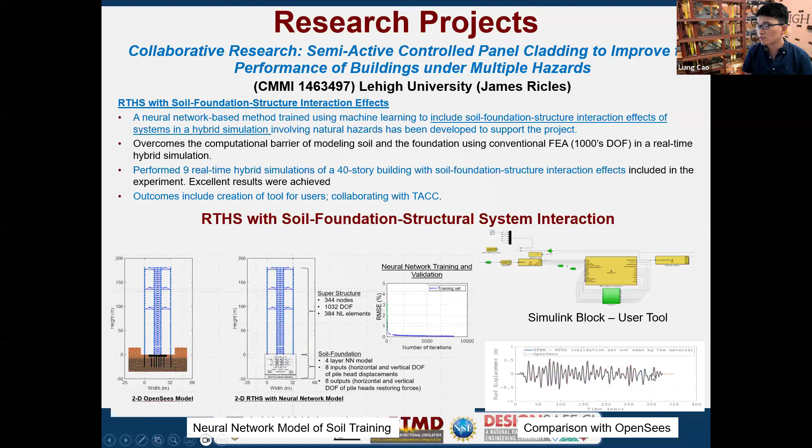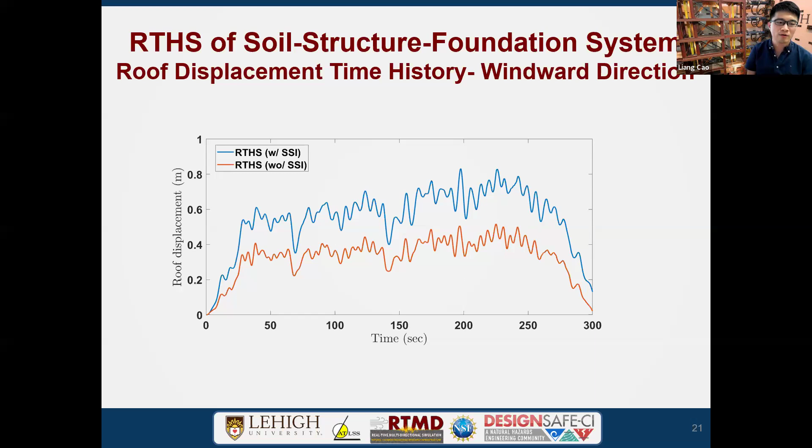And by studying soil-structure-foundation interaction in real-time hybrid simulation, we compared the results with and without the soil effect. You can see there is a 50% change in the roof displacement, which is a significant change. This highlights soil-structure interaction as a potential study in the future, because none of the structures are sitting on a solid concrete floor. They are standing on soil, and the soil is going to play a very important role in future natural hazard studies.

So this project is not a collaboration project. It's a project from the University of Oklahoma, from Dr. Scott Harvey, investigating the multi-directional nonlinear dynamics of floor isolation systems. Our NHERI Lehigh facility acts as the test facility; we provide the test bed for their studies. So when you're writing proposals, we don't have to be the co-PI; we can also be a user-serving center to provide you the results. This is what we are doing for Scott Harvey at the University of Oklahoma.

So basically the scope is to perform large-scale floor isolation system characterization tests to experimentally validate this physics-based mathematical model. First, we install the floor isolation system on our shake tables and run characterization tests, and then provide the data to them so they can numerically model these floor isolation systems. And we also perform large-scale real-time hybrid simulations to quantify the performance of these floor isolation systems in different types of buildings.

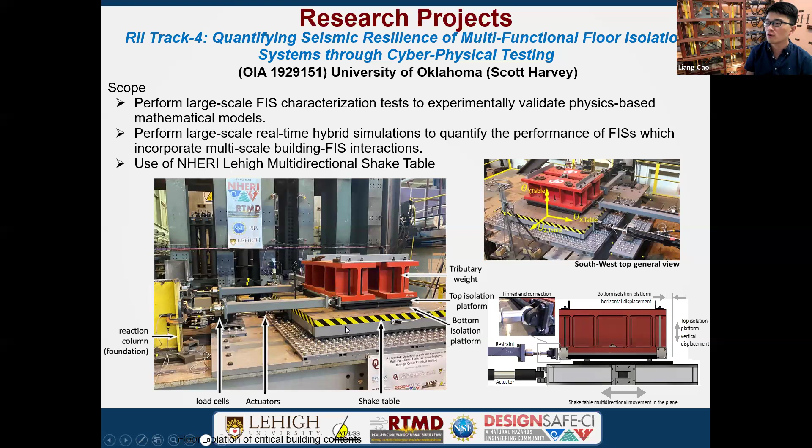And you can see the floor isolation system is actually standing there. The red beam is trying to mimic the non-structural component weight, because this floor isolation system is not for the structure; it's for protecting non-structural components, like heavy expensive equipment in hospitals, which can stand on top of these floor isolation systems. There are 3 restrainers capturing the resisting force from the floor isolation system.

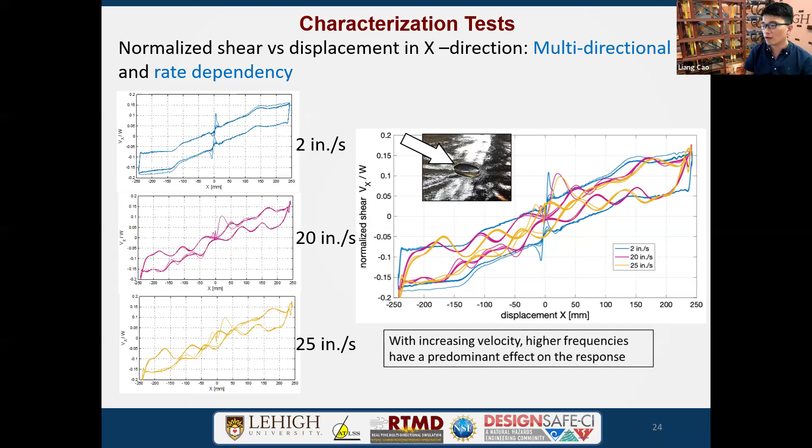First, when we did the hybrid characterization test, we found out this floor isolation system is highly rate dependent. You can see when we apply it at different speeds, the restoring force we capture from the floor isolation system is quite different. So with increasing velocity, the high frequencies have a really significant effect on the response. That's the reason why we have to do real-time hybrid simulations.

So for the real-time hybrid simulations in this study, we created not only the 3D building, we also modeled the contents in the structure, where the contents and the building are both analytical substructures, and the experimental substructure is only the isolation system, which connects the content model with the building.

And once the simulation coordinator receives the input excitations, we give analytical commands on the buildings and the experimental command on the floor isolators, and we get restoring force feedback from both experimental substructures and analytical substructures.

So here, these are the videos of these studies. The top left two graphs are the normalized restoring force of this floor isolator system in two directions, and also the top views of these floor isolator systems. And the right bottom graph is the 3D view of these floor isolator systems.

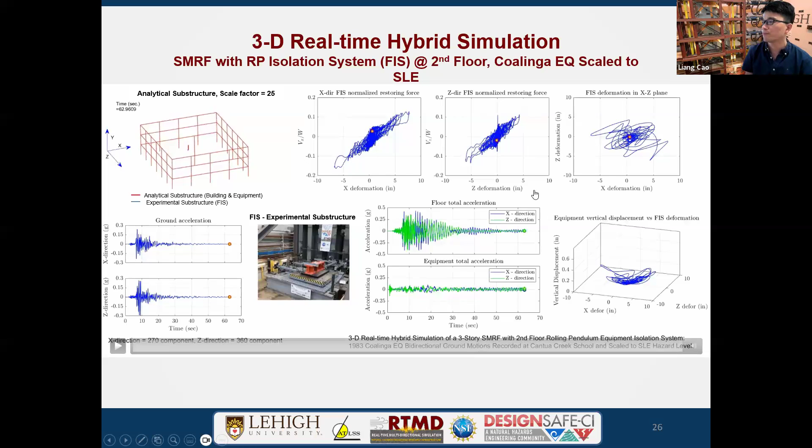So here are the quick results. By using these floor isolator systems, we're able to reduce the equipment accelerations up to 80% in one direction, and in the other direction 70%, which is pretty impressive.

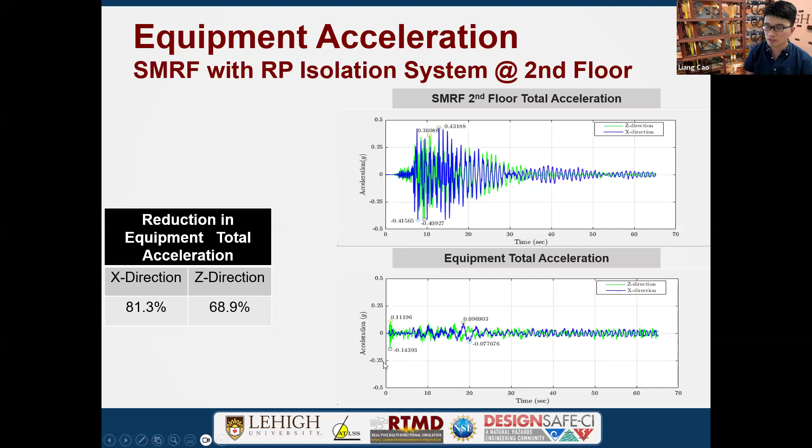The next project is we investigate novel pressurized sand dampers utilizing our cyber-physical dynamic lab test beds. So here, we studied the damper performance. First, the scope is to conduct characterization tests to study the dynamic behaviors under different temperatures.

This is what we did. We are using wire type heaters to heat the damper. This is the damper mock-up. When we are doing this, we have different types of thermocouples to test the heater performance. And then we also did the heating test on these dampers by conducting the characterization test. And we also performed real-time hybrid simulations to validate its seismic mitigation performance.

So typically this damper is utilizing sand. There's a piston rod in the middle with some spheres to generate pressure on the sand, and the total damper force comes from the pressurized sand with friction, and we're using four nuts to give pretension on the steel rods in the corners, where we can give pre-pressure on the sand.

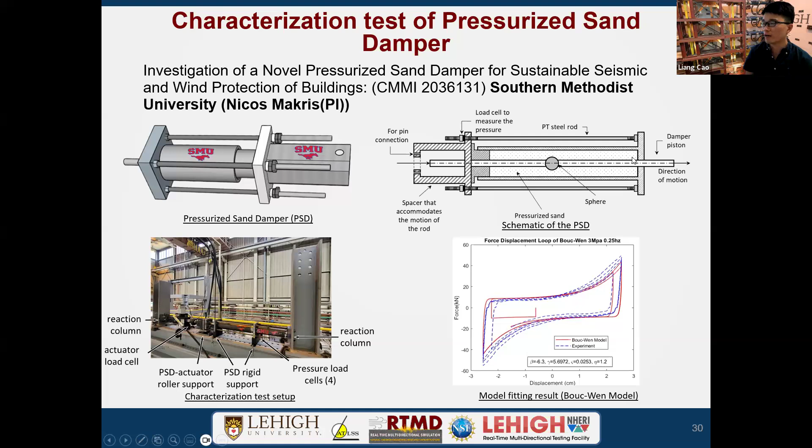So it's quite different from typical friction dampers. Typical friction dampers have constant friction force, but right now we have pressurized sand. When the spheres reach the end and the sand has nowhere to go, we generate high pressures. That's why you can see this pinching effect.

So to do the hybrid simulations, here we investigate the performance of this sand damper by installing these sand dampers in a CLT rocking wall, because we know the CLT rocking wall, including the post-tensioning, has self-centering capabilities, but typically lacks energy dissipation. When adding these dampers on two sides, we are hoping these dampers can enhance the energy dissipation

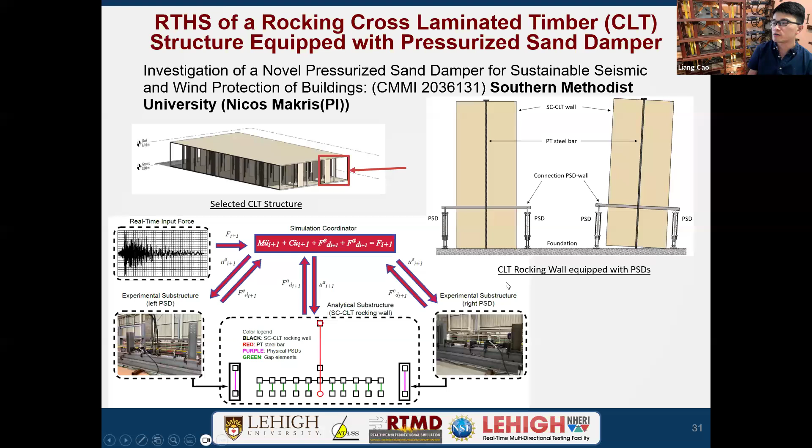of this self-centering rocking wall. So in this case, the self-centering rocking wall was modeled as an analytical substructure, utilizing a lot of nonlinear elements to mimic the rocking effect. And then we have two experimental physical dampers, pressurized sand dampers on two sides, to study their performance.

So these are the last two projects, which are the large scale testings. This one is a collaborative research project between the Colorado School of Mines and Lehigh University. Here, the overview is to design and construct low damage resilient 3D CLT buildings and investigate the lateral load response and damage of the self-centering CLT walls under multi-directional loadings.

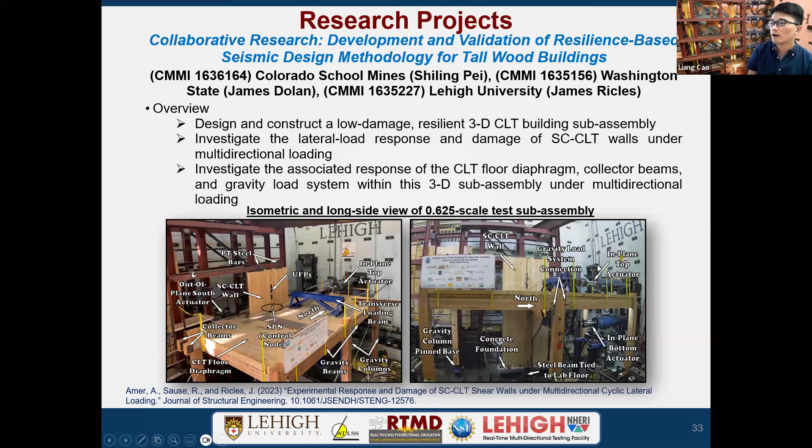So we built this, it's a 5/8 scale CLT wall, self-centering CLT rocking walls in our lab, including the floor and then the columns. And we are trying to do a multi-directional loading test to study its performance.

Here is the technical details between the collector beams to self-centering wall and the floor diaphragm to self-centering wall as well. So the test we did was sub-assemblies, and we designed considering force and deformation demands expected during the multi-directional lateral load testing, with 3% story drift as the performance objective for damage initiation to sub-assembly components and connection details.

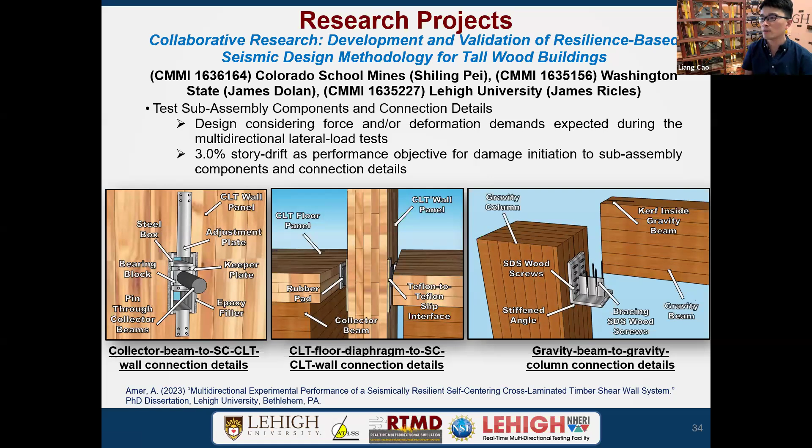We also developed a multi-directional displacement control scheme because the actuators we're utilizing are 4 large-scale actuators driving these large-scale test displacements in multiple directions, and the connection point on the actuators is not the control point. The control point is the center of these floor diaphragms.

So that's why we have to develop displacement control schemes to control the in-plane and out-of-plane floor drift and vertical motions. And all this connected kinematic relationship between the control node, feedback displacement sensors, and actual command displacement can be found in Alia's dissertation. She was the PhD student who studied this project.

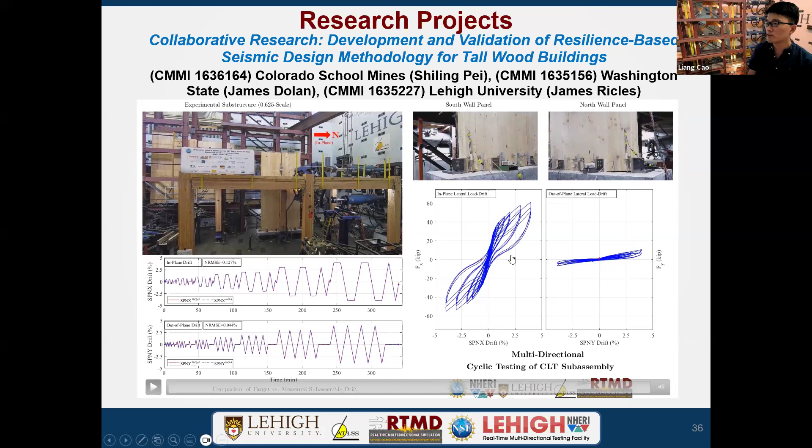And the last project, the most recent one we are doing in our lab, also currently ongoing, is to study the performance of seismic collectors in steel building structures. This is a collaboration project between University of Arizona and Lehigh. The project overview is to investigate failure-critical components of steel seismic force resistance systems, which are seismic collectors, through finite element analysis and large-scale testing.

The most important part here is we are using 4 large-scale hydraulic actuators to conduct up to 1,000 kips of axial force. So in our lab, the project will be used to support the finite element modeling and studies of collectors and floor diaphragms.